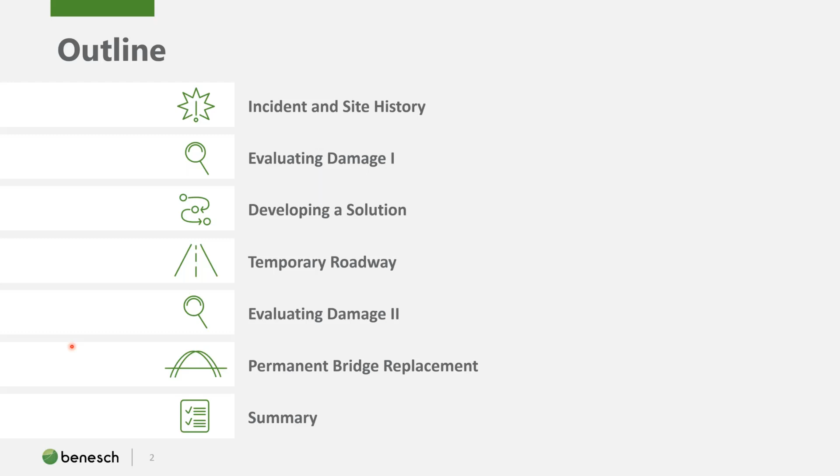This section of 95 sees about 160,000 vehicles per day. Each bound of 95 is carried by a single span steel plate girder with a composite concrete deck. This structure and roadway is owned by PennDOT District 6, and they quickly found themselves in the position of having a very heavily traveled interstate closed for the foreseeable future.

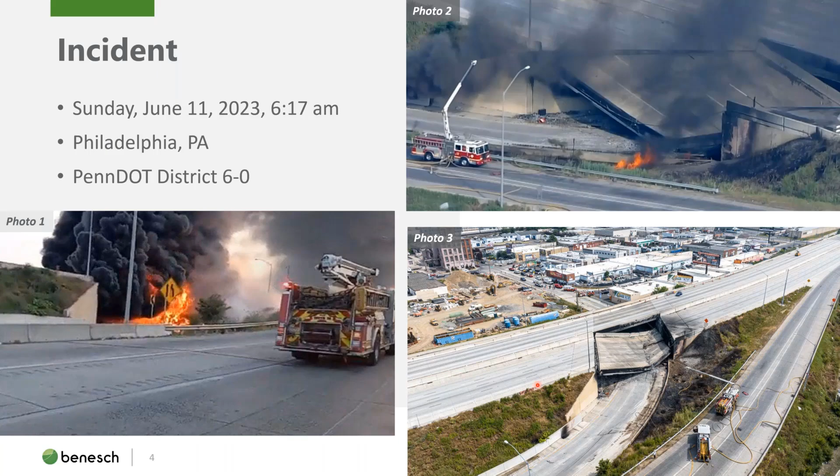So a little bit of context on Interstate 95, if you aren't familiar with this area of the country. I-95 is a north-south interstate that is about 1,900 miles long. It runs from Miami, Florida, all the way to the US-Canada border in Maine. It carries a lot of commercial traffic, about 8 to 9% of the traffic, and it's an important part of transportation along the East Coast.

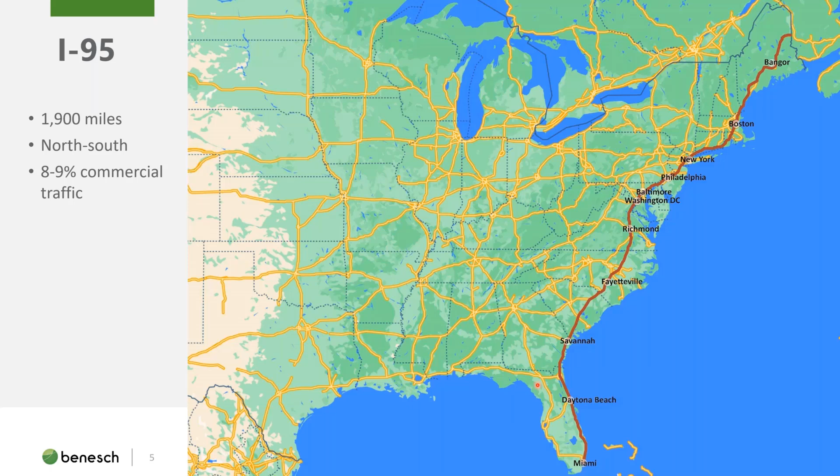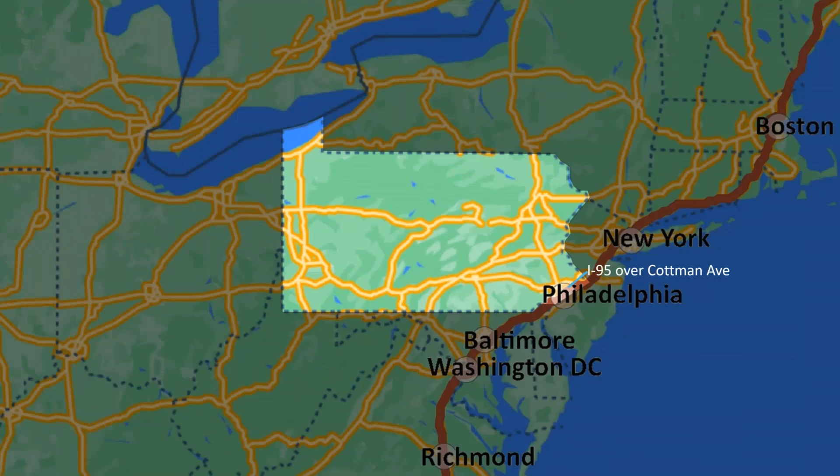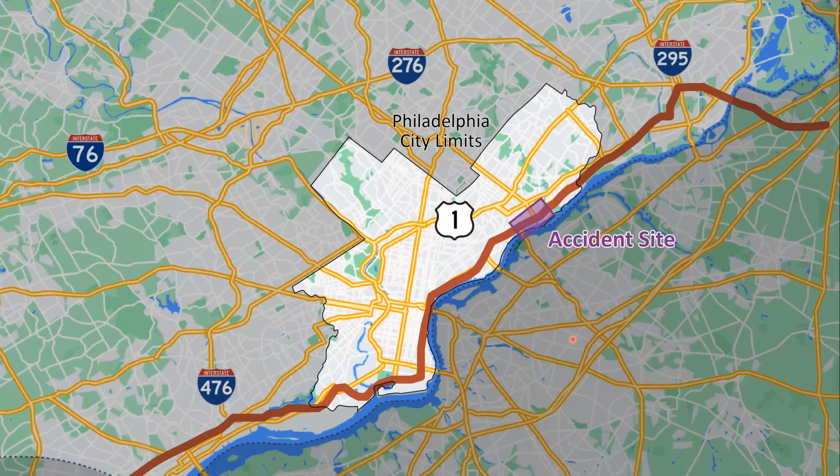So the reason Benesch got involved with this interchange is because we've actually been working at this site for over a decade. PennDOT District 6 has a large project initiative called 95 Revive, which is rebuilding 8 miles and many interchanges along 95 in Philadelphia. It's broken into about 5 different projects, and one of those is the Cottman Princeton interchange, known as CPR, and Benesch is the prime consultant on that project.

CPR covers interchange improvements and reconstruction of 1.4 miles of Interstate 95. It was broken down into 5 different contracts. The most important contract for this group to know is CP2. In CP2, that bridge that you saw collapsed a few slides ago was reconstructed and widened. It was designed in 2010 and constructed over a few seasons from 2014 to 2016.

So it was a relatively young bridge, which did influence some of the ideas and direction the project team took. Another thing to note is most of these contracts were complete at the time of the accident. The CP3 contract was ongoing, so you may see construction activities in some of these photos that are separate from the accident. The total cost of this whole project was $340 million.

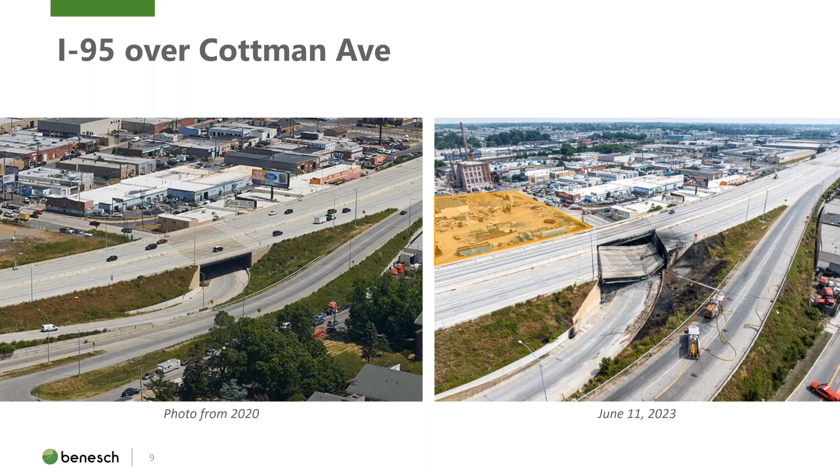So what does a bridge look like after a tanker truck fire happens underneath it? And the answer is it's not good.

On the same day as the accident, an emergency bridge inspection took place on the still standing southbound structure. This was a visual and hands-on inspection, and the group found heavy soot staining on the bridge, which you can get a feel for in this photo - it almost looks like a black and white photo because everything has so much soot on it. This heavy staining really limited the team's ability to complete their visual inspection. They could not inspect connections for displacement-induced cracking.

The fire department actually tried to hose off this bridge an additional time once the fire was out, but they really could not get any of that staining to come off the bridge.

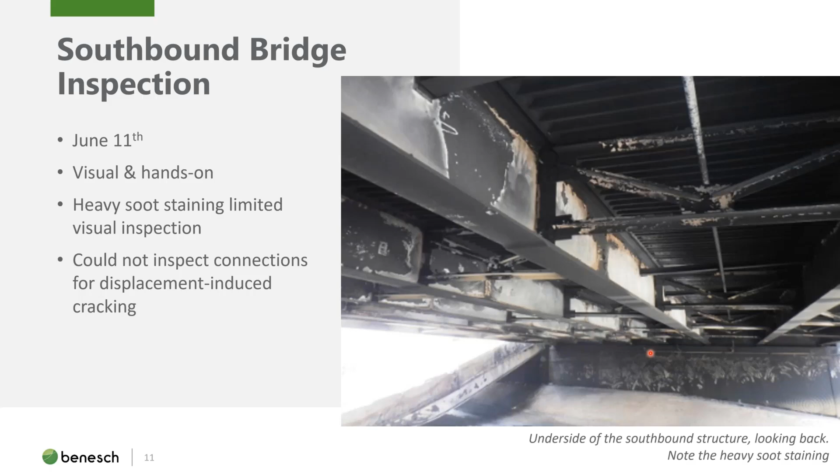This slide has more photos from the bridge inspection. The photo on the left, we're looking at the girder - it's a steel plate girder, bottom flange, top flange, web. These girders exhibited significant web distortion. Closest to the fire, this web distortion was about 2.5 inches for a web that's 43 inches deep. The photo on the right shows cross-frame distortion compared to a level. And then finally, there was significant bottom flange, lateral, and vertical distortion. There were also beams that were not fully bearing on their neoprene bearing pads.

So it quickly became clear from this inspection that the southbound bridge could not be salvaged in any permanent or temporary form. It was decided the same day as the accident to demolish the southbound bridge and start generating ideas to reopen both the northbound and southbound sections.

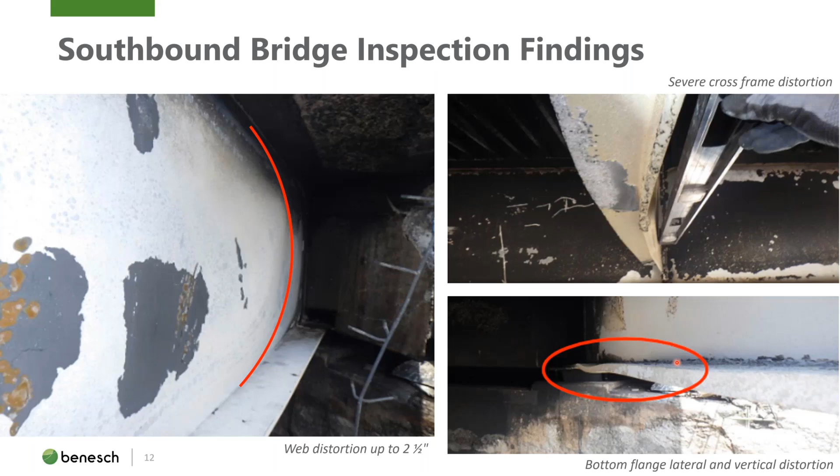Another interesting finding from the southbound bridge inspections comes from social media. This day and age, everyone has their phone on them and takes pictures and videos in all parts of their life. As the southbound traffic was still running over the bridge, and with the little bit of delay it took to get it closed, people were taking videos as they drove across. If you watch any of those videos, you can see a significant dip as the vehicle travels over the bridge, like a sag in the bridge.

This is a screen grab from one of those videos, and just doing some rough proportioning based on dimensions of the median, there's a sag in the bridge during the fire on the order of 9 inches. However, when the inspection team came back once the fire was out, there was no sag noted. The team actually went and measured vertical clearance, compared it to the previous inspection report, and saw no noticeable difference.

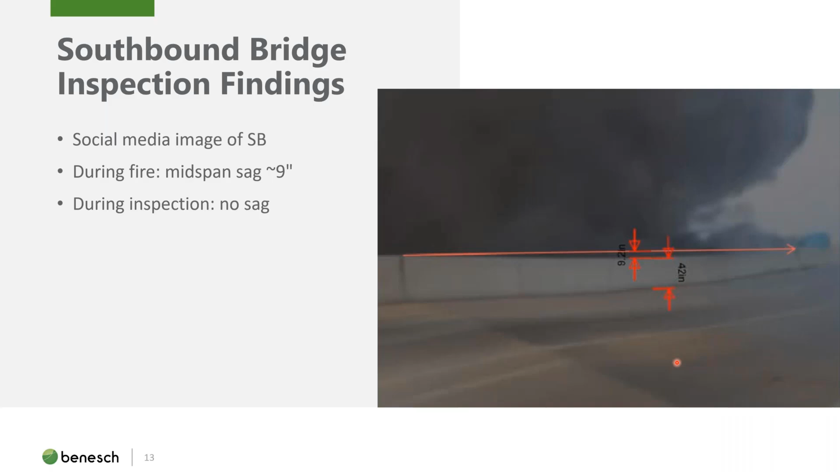However, the bridge was under a great deal of distress. This is a picture of the median barrier of the southbound bridge after the fire, and you can see significant crushing, cracking, and spalling of concrete. We can even see this mat of green epoxy-coated rebar. So that barrier during the sag was obviously under a lot of stress.

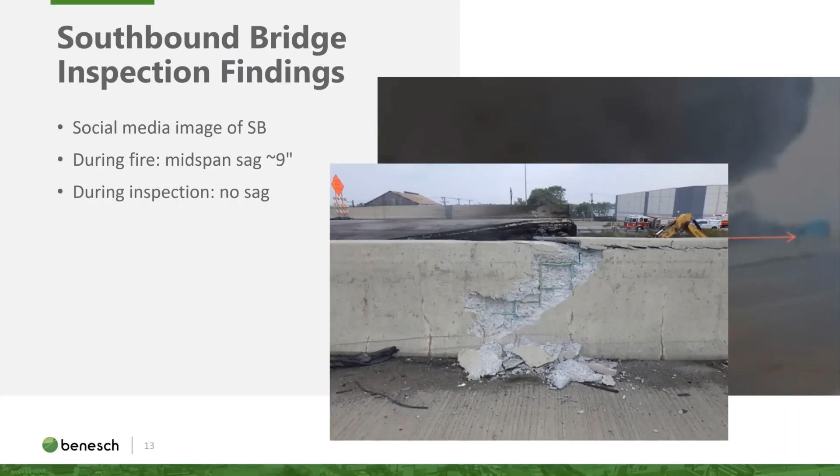Once it became clear that the southbound bridge would be closed, the project team started putting together ideas. The project team consisted of PennDOT District 6, which owns the bridge, a contractor, Buckley and Company, and a designer, Benesch.

I'm going to give you a little background on this project site to give you context about the project solutions. As I mentioned, it is two structures, one carrying northbound 95 and one carrying southbound. Each bridge consists of eight steel plate girders, 16 total, with a composite concrete deck. The bridge is about 103 feet long and has a healthy skew, 34 degrees by the AASHTO definition, 56 degrees by the PennDOT definition.

Interstate 95 here is actually curved, running along a 3,000-foot radius. The bridge beams are not curved, they're straight, with a varying overhang to accommodate that geometry. Because of that curvature, the cross slopes of the bridge deck are super elevated, and the geometry between the two gutter lines on the inside of the bridge actually differs. This doesn't matter when the bridges are separate, as in their permanent final condition. However, when we brought that geometry together for a temporary roadway, that difference actually mattered, and I'll cover that in a few slides.

The out-to-out width of these bridges is about 75 feet. An important thing to note on this plan view is these blue lines. These are sewers running underneath the ramp that leads to Cottman Avenue, Philadelphia Water Department sewers that drain significant portions of Philadelphia during rain events. The Delaware River is sort of south of us in this plan view. Those sewers were in place, and it was important not to overload them as we developed this temporary roadway idea.

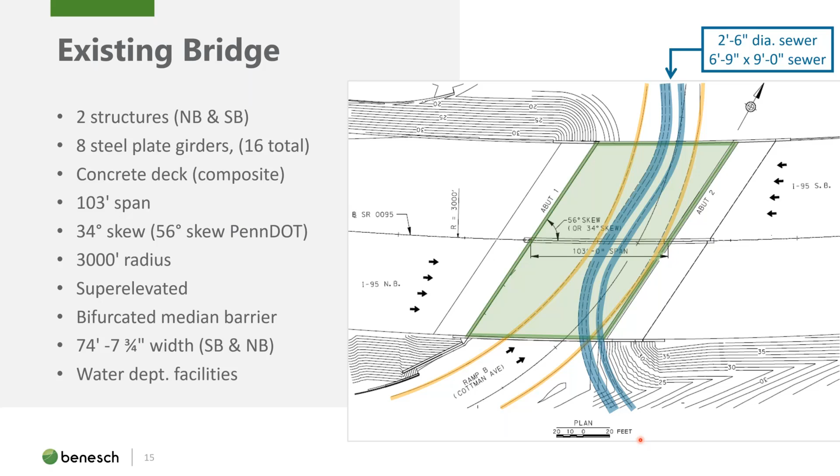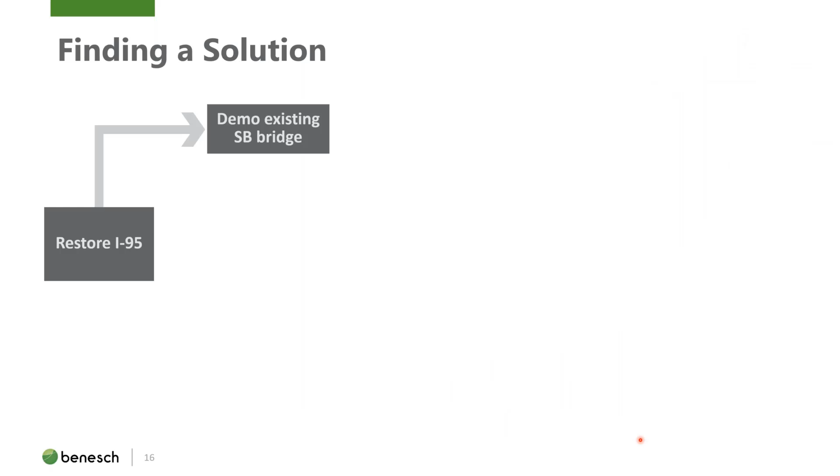So how did the project team develop a solution? The goal was clear: restore 95 to its full capacity. It was clear that the southbound bridge had to be demolished, and the goal was to get to a permanent bridge solution, which in Pennsylvania means a structure with a 100-year service life.

One of the first ideas was just rebuilding the structure as quickly as possible. This structure was designed in 2010 and constructed a few years later, so it was relatively new, and we as designers still had the shop drawings. Someone on the project team reached out to a local steel fabricator, High Steel, and asked if we provide the shop drawings today or tomorrow, how fast can you fabricate these beams and get them on site? High Steel said about 8 to 10 weeks, a really quick turnaround for steel fabrication.

However, that would just be getting the beams to the site. They would still need to be erected, you'd still need to pour a deck and a barrier, do the concrete repair work, replace the approach slabs, and weave everything together with the interstate. So this timeline was still looking like 3 to 5 months. This full rebuild could be achieved in 3 to 5 months, which is really fast, but having that interstate closed for that long felt like too much of an impact to Philadelphia and travel along the East Coast. So the project team started looking at other ideas.

This is where the idea of a temporary roadway came in. Could something be constructed quickly, in a matter of weeks, to restore some capacity at the site to get traffic moving, with the permanent bridge then built in stages around it? One issue with the temporary solution is that anywhere you build something temporary, you're building something in the way of the permanent bridge, so staging became very important in both the temporary roadway and the permanent bridge stages.

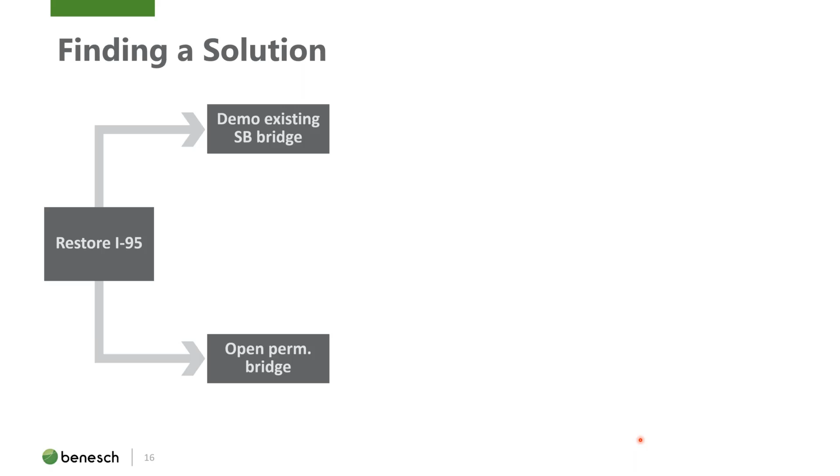The solution involved demolishing the existing bridge and constructing a temporary roadway to open Interstate 95 at 75% capacity. From the start of demo to the opening of the roadway was 12 days, originally estimated on the order of weeks, but the contractor was able to deliver it very quickly. This came at a cost of about $5 million for both of these projects.

The demolition was completed by one contractor with a direct contract with PennDOT. Design work related to the temporary roadway was completed by Benesch, contracted with PennDOT, and then a separate contractor, Buckley, constructed it in 12 days, also contracted with PennDOT.

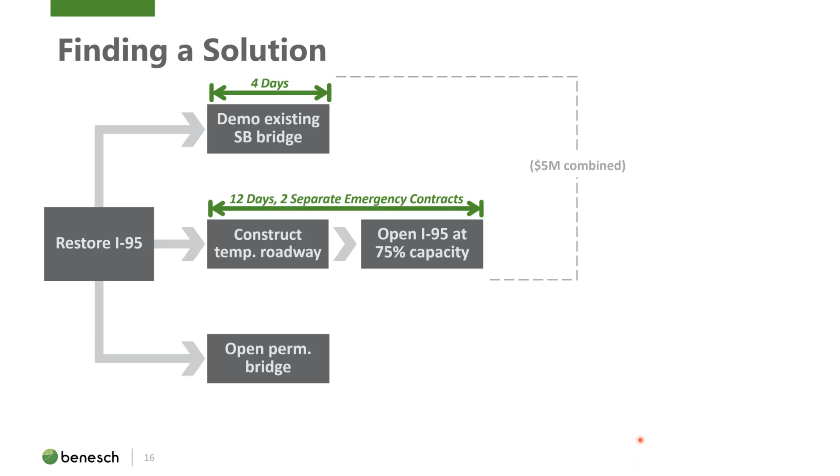Once that was complete, work moved to the permanent bridge replacement. That looked like updating the steel design first, because we had the opportunity and a little bit of time to do it, ordering and fabricating the steel on a very accelerated timeline of 8 to 10 weeks, constructing stage 1, which took about 5 months, and then finishing construction of stage 2, which took just under a year.

The work related to the permanent bridge cost about $18 million and was delivered with a design build contract for efficiency to move through the design quickly.

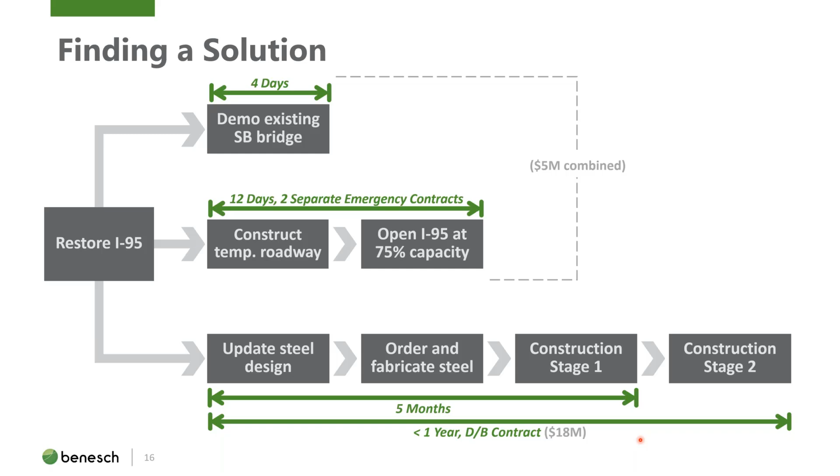A little bit more about the temporary roadway solution with some graphics. The idea was to start building a temporary roadway in the middle of the section of 95, using retaining walls and fill to build a roadway on top so traffic could use it. In stage 1, traffic uses the temporary roadway, 3 lanes in each direction, while stage 1 of the bridge construction starts.

Once stage 1 is complete, traffic is moved to the outside, again 3 lanes in each direction, and stage 2 construction starts. Once stage 2 is done, the site can be fully restored back to 4 lanes in each direction.

Now, if you were paying attention, I told you that the out-to-out of each bound was about 75 feet. If you start adding up the numbers, on one bound we're going to have 3 11-foot lanes, about 33 feet. In the next stage, which is separate, we're going to have another set of 3 lanes, so we're up to 66 feet of lanes, plus some room for barriers and a little bit of room to work between the stages. You can see how we get very close to that 75-foot out-to-out, and how these staging limits really worked by a matter of inches.

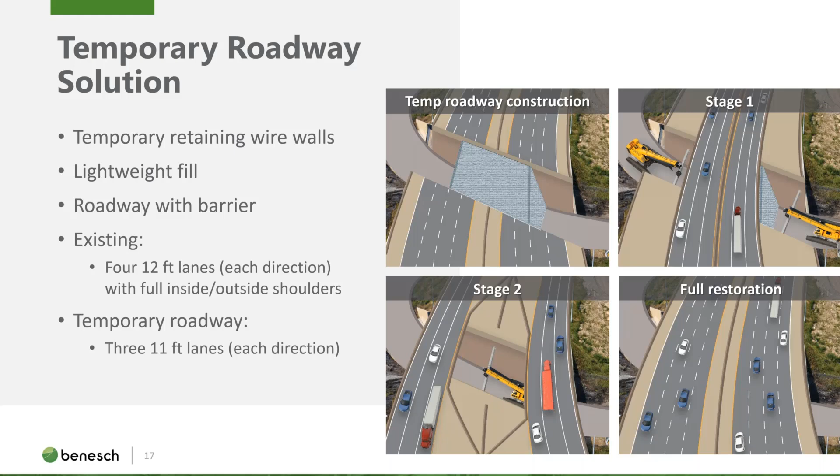Now I'll talk a bit more about the components of the temporary roadway. Here's a cross-section from our design plans. You can see 11-foot lanes on top and another set for the opposite bound. The temporary roadway consisted of leveling out the area on Cottman Avenue and using a combination of steel wire walls to act as retaining walls and ultra lightweight fill to act as the fill between the walls.

There are geogrid straps that extend into the lightweight fill for additional capacity. The wall extends up until we get to a reasonable elevation to put down a roadway subbase and then a typical asphalt roadway. The roadway is contained by a special outside and inside barrier, which I'll get to in the next few slides.

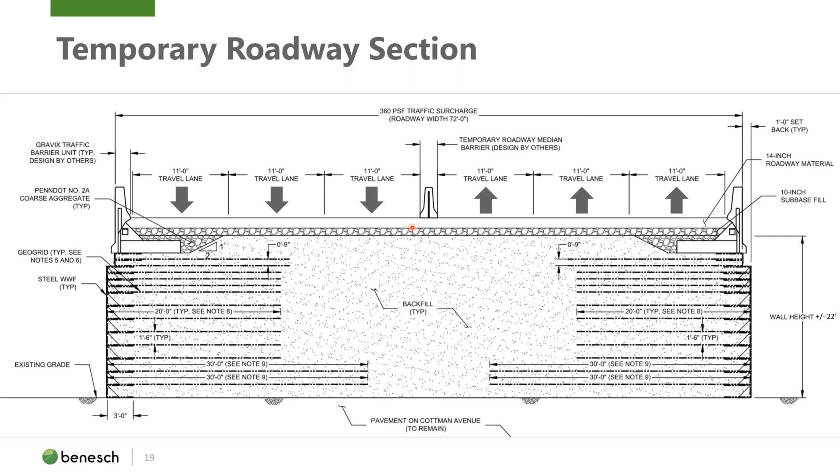The ultra lightweight fill is actually ultra lightweight foam glass aggregate, selected to minimize loading on the sewers underneath Cottman Avenue. This is an interesting product. Typical fill might run between 120 to 150 pounds per cubic foot, but this fill is very light, 20 pounds per cubic foot, and feels like a pumice stone. It has a high friction angle at 40 degrees. For this project, we used 8,000 cubic yards, produced from 8 million recycled glass bottles, so there's a nice sustainability component to this kind of fill.

It's very lightweight. It can be shipped by truck or even plane. It's non-toxic, non-flammable, non-porous, and insulated. And like every component of the temporary roadway, it was available for very quick delivery to the site. This particular product is made in Pennsylvania, and the fabricator actually has a couple other plants throughout the United States. This is also a product that the designer and the contractor and PennDOT have experience using in nearby and adjacent sites.

So as you can see in the photo here, there is a construction worker using a hand compaction tool to compact this material. One unique thing about this is that you can't use traditional rolling equipment to compact the fill, or else it will actually start to crush it. It needs to be compacted with hand tools, and once it is and locked into its matrix, it's very capable of managing vehicular loads.

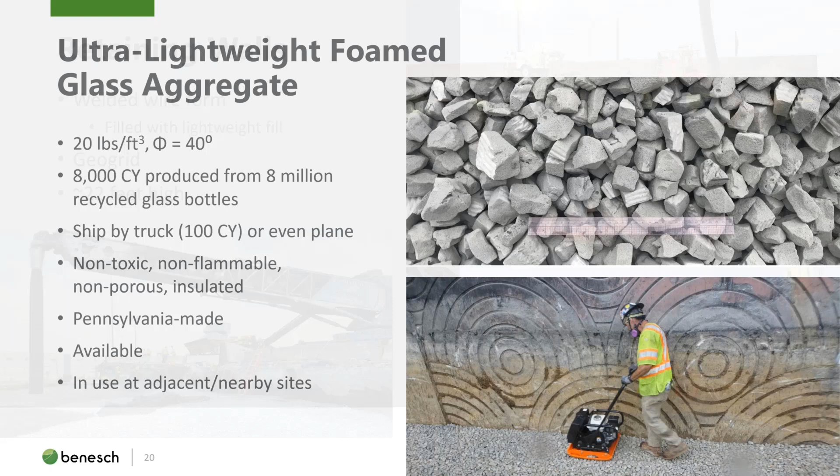So the next component is welded wire form walls that were filled with a lightweight fill. You can kind of see they look a little bit like baskets. You can see sort of the different levels of these walls, and it's sort of a grid and just is built up to the appropriate height. And the fill was placed with a lot of machine work, using sort of ramps and hoses to get it where it needed to be on the roadway. And again, those walls are about 22 feet high.

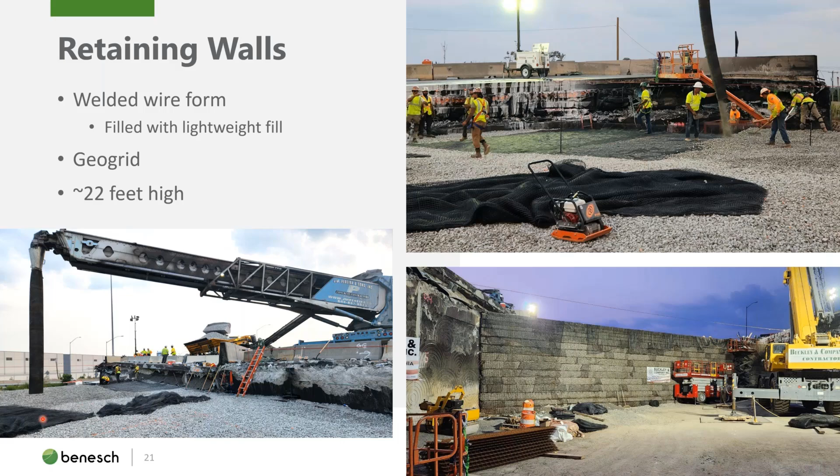So moving up to the roadway, the outside barriers that were used were a unique product. These are precast barriers called Gravix barriers. They are basically little moment slabs. It's an L shape, and the bottom of the moment slab is loaded by a typical roadway subbase 2A, not the ultra lightweight fill. And once it's loaded, it provides some capacity for the barrier to resist impact from vehicles. This barrier has actually been crash tested and has a MASH TL4 rating.

These units come in a rectangular footprint in plan, and since we have a skewed bridge site, we actually had to do some additional cutouts at these ends of the bridges, or as you moved into the roadway. So additional approach slab, diaphragm, and back wall areas were cut out to slot these rectangular footprints into the skewed site.

Another thing to note is these barriers are meant to kind of sit on MSE walls, and it has this nice tab that sticks down to make a nice appearance. We didn't need this tab. It's for aesthetics, not for any structural capacity. So this was removed so that the wall and the barrier could be as close to flush, because again, our staging limits were very tight.

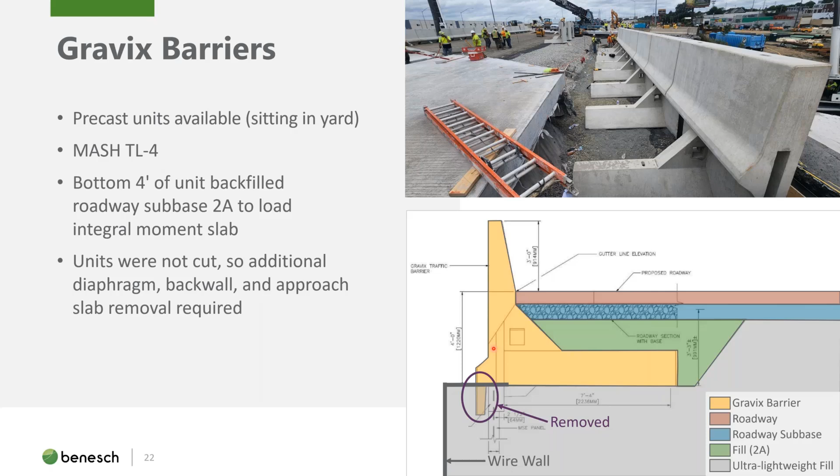The median barrier was also unique. It is a typical embedded median barrier. However, due to the curvature of 95, the existing roadway and the cross slopes of the bridge and the roadway needed to be super elevated. As you bring that geometry together in the median, the gutter lines are separated by about 4.75 inches. So we needed to put a bifurcated median barrier into this roadway.

These types of bifurcations aren't the kind of thing that are just sitting around. So this barrier was actually fabricated for this project. The contractor reached out to the fabricator who made the median barriers in this project during the original construction from 2014 to 2016. That fabricator had two forms that were available that they could modify. They did so, and they basically cast these barriers for 5 days straight, 24 hours a day, including a weekend, so they could be delivered just in time for construction at the site.

They were shipped with a strength of 3,000 PSI, and the fabricator was breaking cores regularly to make sure they knew exactly when they could pull that form off. And they have a 28-day strength of 4,500 PSI.

So from rendering to reality, one thing I haven't mentioned yet, and I think is obvious with this project, but this project had a lot of attention locally, nationally, even maybe internationally. It was a big impact to a major city on the East Coast, and there were press conferences. There was a live stream camera that was constantly running to show construction activities at the site. There was a PennDOT website set up to provide regular updates to the public.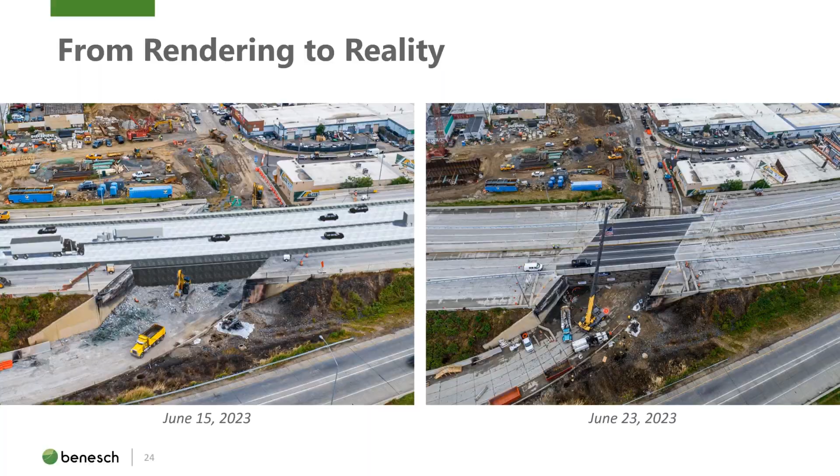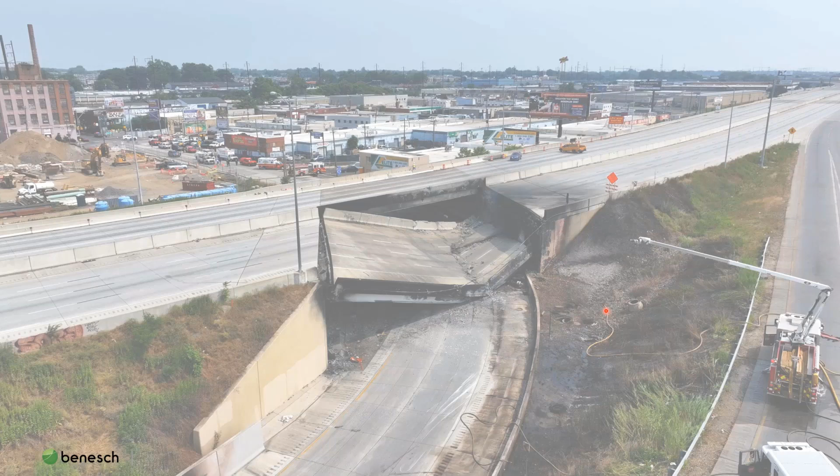So I have a video just to show you some highlights from the temporary roadway construction. So we're starting back on the day of the accident with the collapsed northbound bridge. And those shots of Interstate 95 being completely empty are sort of jarring for me. It should be full of traffic and people trying to get where they want to go, but it was completely closed. We're moving into demolition of the northbound and the southbound structures and cleanup of the road below to prepare it for the temporary roadway.

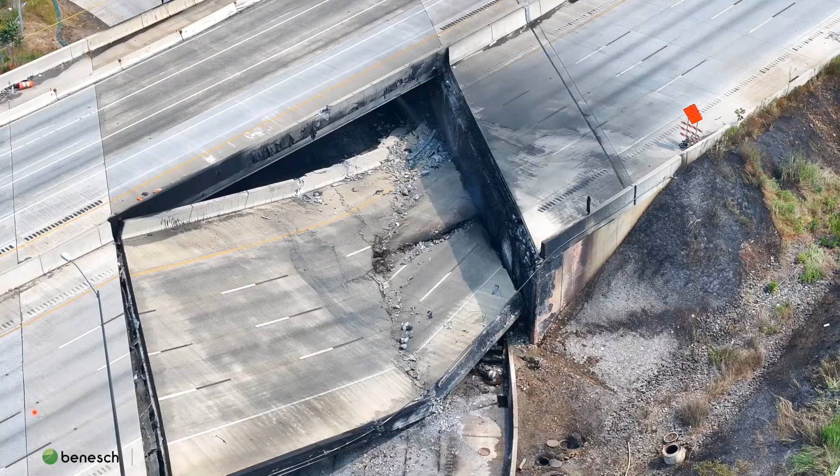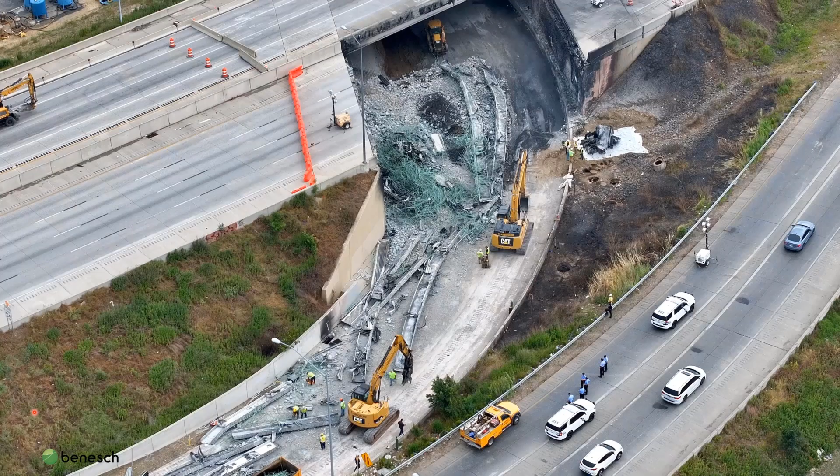And then we're moving into construction of the temporary roadway. You can see the lightweight fill being placed between the walls. And it's clear from this shot, this is a night shot. Work went on this site 24 hours a day to get this open as quickly as possible. We're moving up to the roadway height.

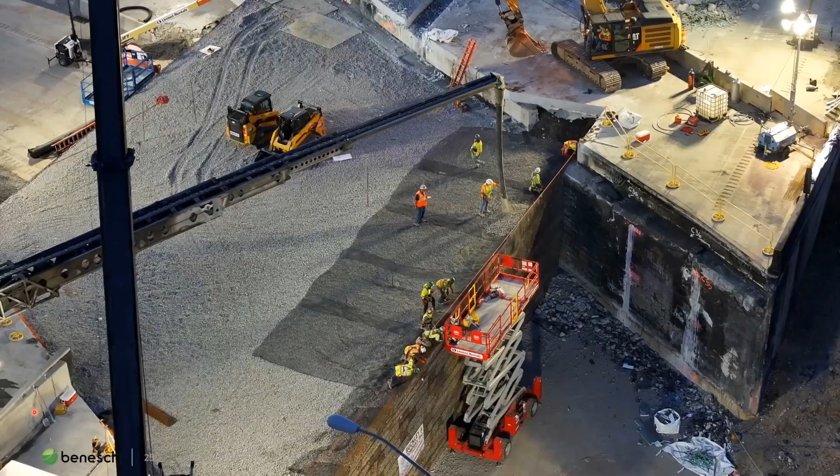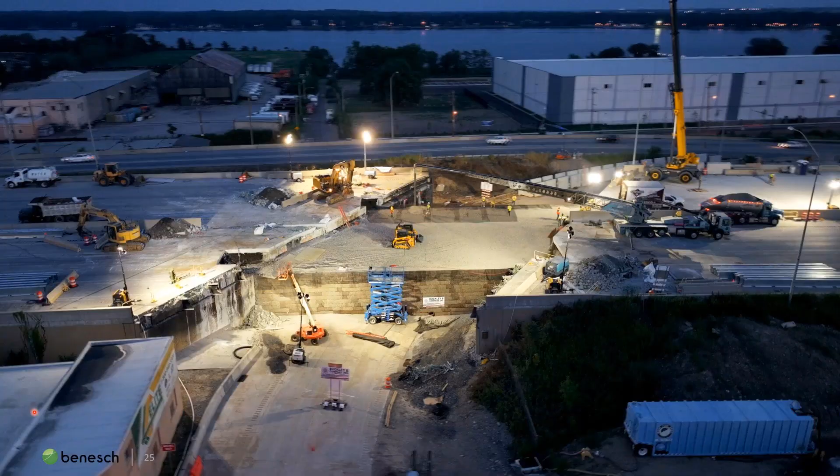And then we jump forward to opening day. Right before it was open to traffic, this traffic you see on the left side is actually detour traffic. And then here we have the first set of traffic moving across the bridge in those 3 lanes. And a short time later, that other side was open.

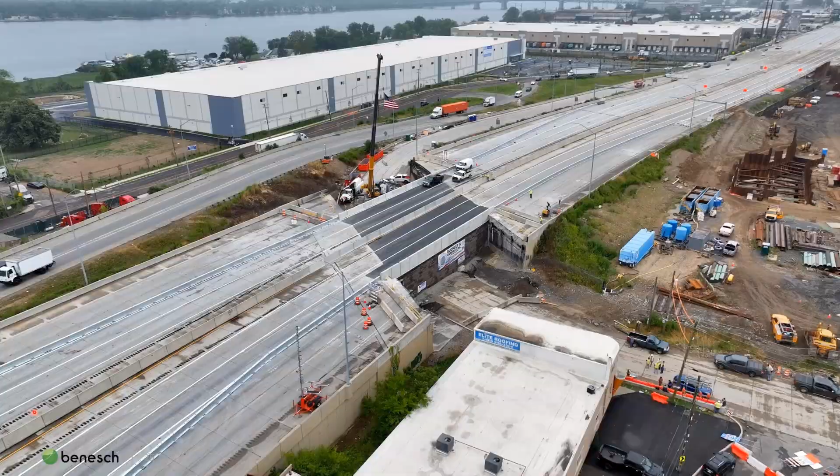This abutment in its original form had 1.5 inches of architectural treatment plus 2 inches of cover before that first mat of rebar. So that fire was so intense that it spalled out several inches, maybe even up to 8 or 9 inches of concrete from the existing face of the abutment wall. This abutment is actually just a cantilevered abutment, and it has a battered back wall. So it's actually over 4 feet thick at the base.

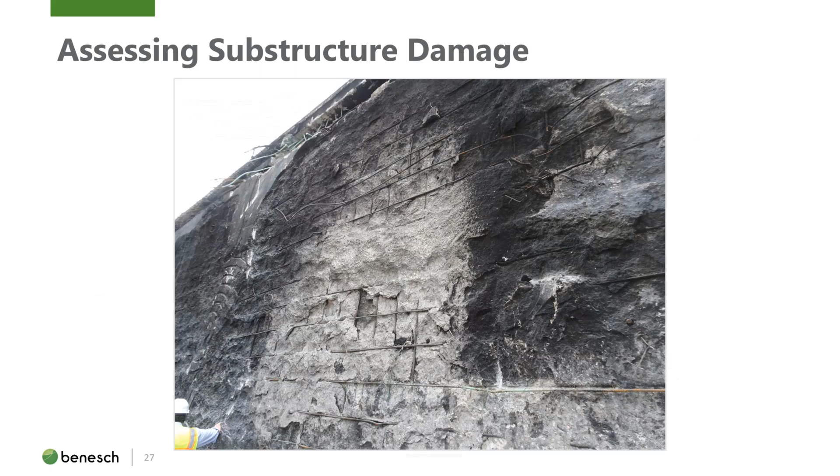So just from some evaluation with the contractor and the design team, everyone felt that the abutment probably could be repaired, meaning removing the damaged concrete, replacing any rebar, and then recasting new concrete to restore it. But it was important to evaluate what was actually going on there. So the project team hired a company to come out and take concrete cores all over these abutments. This plan view shows the rough idea of how the cores were taken, 12 cores more near the location of the crash and fire, but also catching every abutment to get some information.

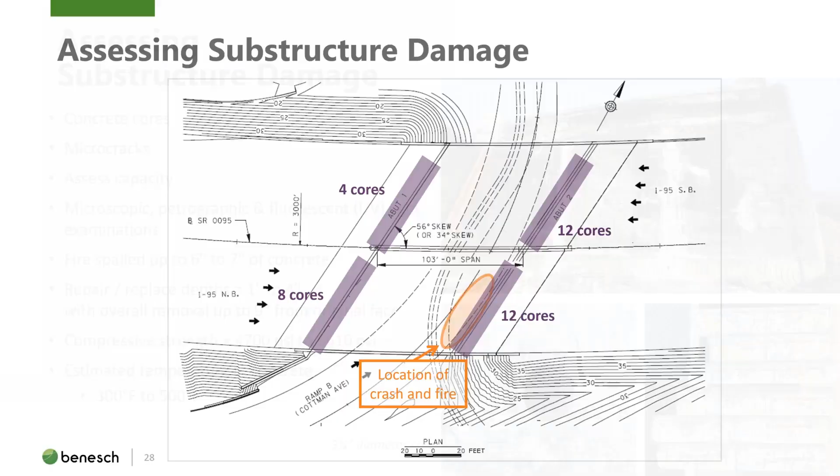So those cores were taken to a lab and they were evaluated for existing microcracks that were left, and also to assess the capacity of the concrete. As this concrete was exposed to intense heat, the water vapor in the concrete matrix tries to expand and you get spalling concrete. And as that concrete spalls, it leaves behind microcracks, which need to be removed to restore the concrete.

So the lab took those cores back. They examined the concrete using microscopic, petrographic, and UV light examinations and found that the repair or replace depth of the concrete that was still there was on the order of 1 to 4 inches. I mentioned fire spalled out maybe 6 or up to 7 inches of concrete in some spots. So we detailed removal depths up to 9 inches from the original face.

The lab also examined the samples for compressive strength, and that ranged from 4,700 PSI to 6,600 PSI, and this is well beyond what we use for design, so that was very comforting. The lab also reported an estimated temperature in the concrete of 300 to 500 degrees Fahrenheit.

We do think of concrete as an insulated material, and it is, because it was likely that the actual fire itself was on the order of 1,800 degrees Fahrenheit. That estimate comes from firefighting teams who are used to responding to these kind of tanker truck fires. So it was a very intense, hot situation, and the bridge and the concrete sort of show those effects.

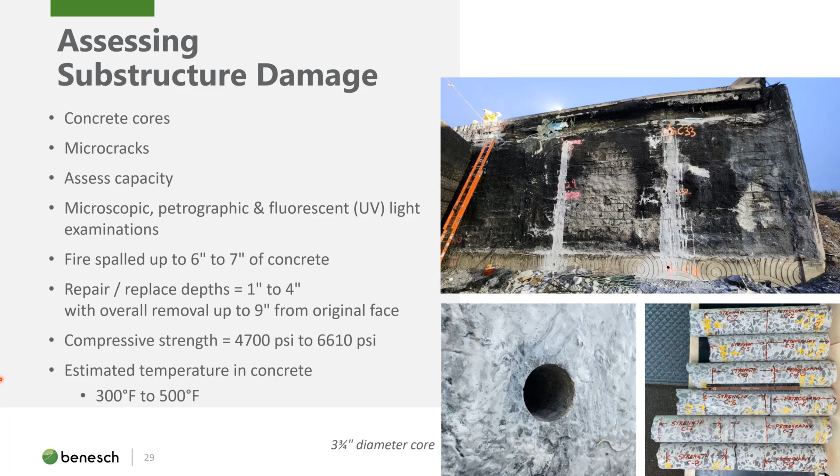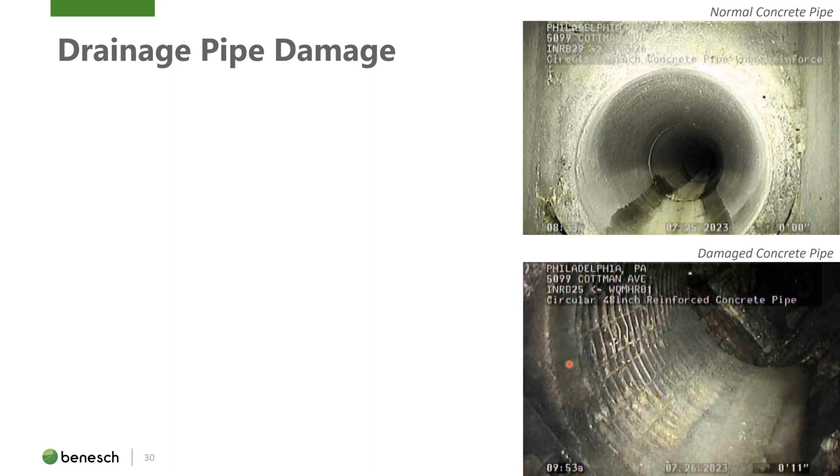However, there were also plastic drainage pipes at this site, and those did very poorly in the fire. So this is a video shot of what used to be a plastic pipe, and it's basically melted and collapsed, and there's nothing left. So all of these areas had to be dug out and have the drainage pipe replaced, which adds time and some of the work to this project.

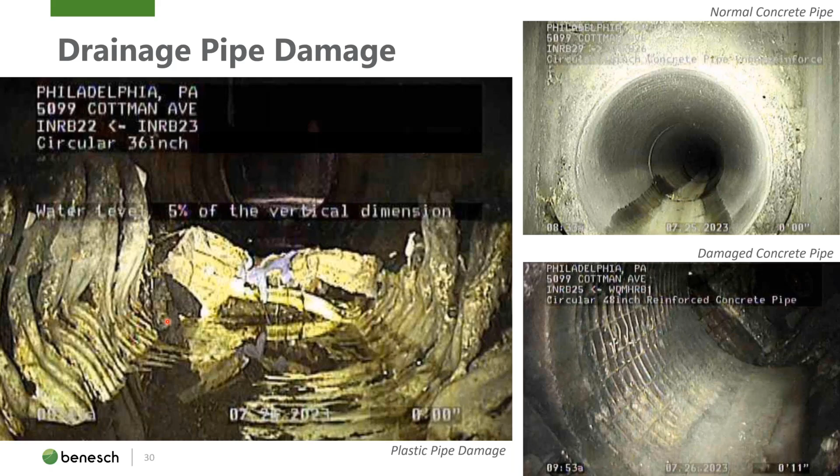One thing to note, in the original design and construction, there were stage construction joints along the top of the beam line because it was built in 3 phases instead of 2. And that's what you would typically do, put a joint on the beam line, and it makes it easier. We had joints that were running along basically in between these beam lines.

So we had to add in some checks in our temporary condition and just be mindful in construction of that really large overhang that actually exceeded the beam depth in some spots. It's not something you ideally do in a typical project, but it's something that we accommodated in this project because those staging limits were so important.

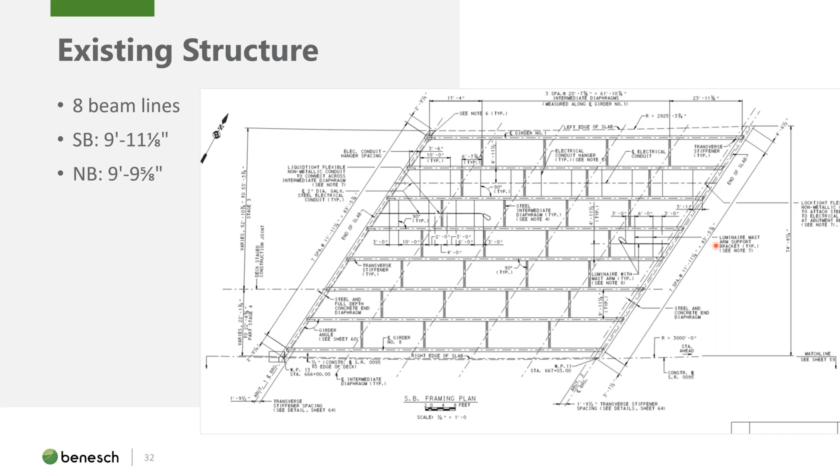PennDOT asked us to update the steel bridge design to current code. So that meant taking this from AASHTO LRFD 3rd edition up to 8th edition. So one thing we did was we changed the barrier height from 42 to 45 inches for the MASH barrier update. We also had to add a PennDOT design truck that had come into play in some of our newer design manuals. It's the P2016-13 truck, and it's very long and it's very heavy.

So it's about 165 tons, and it has a varying length, 103 to 132 feet. And it turns out when you have a bridge that's 103 feet and a truck that's very heavy and also can be 103 feet, it can fully fit on the bridge, and it did end up controlling some of our design checks. We evaluate this kind of truck at the operating level, not necessarily an inventory level, but even at that lower level, it still does control. And as I mentioned before, we incorporated some differences related to that stage construction joint and that big overhang in the temporary condition.

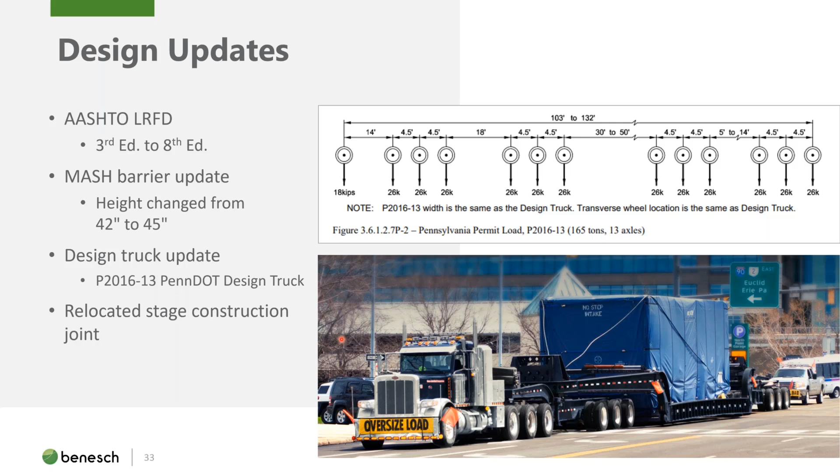Some things we thought about during the steel design: we used a line girder analysis for the beam design, but given that skew, it kicked us into using refined analysis to check a couple things. We used that to pull out cross-frame demands for our design checks, check for uplift in some of those corners, pull out bearing rotations for that design, and check bottom flange lateral forces to make sure those assumptions we used on the line girder were accurate.

We actually had two models for this effort just as a cross-check: one was a LUSAS model and one was an AASHTO BRR model.

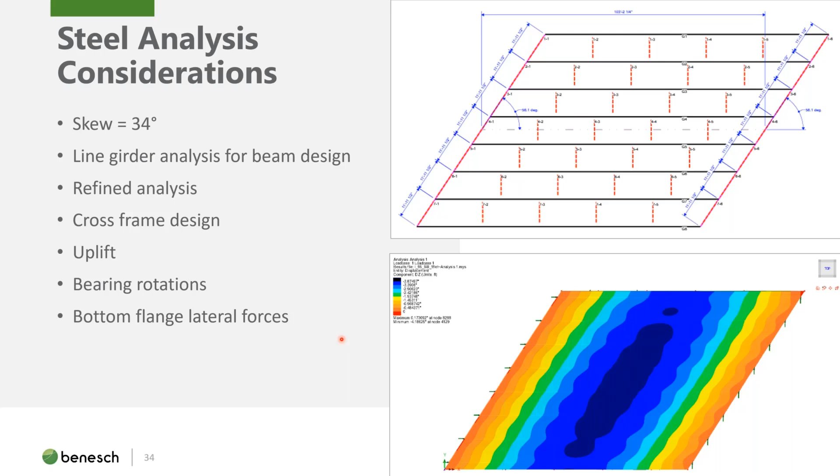So a couple updates came out of the steel design. One relates to the cross frames. The existing cross frame, shown at the top of this slide, is probably exactly what you'd expect for a typical cross frame. It has WTs as the members, which are welded to gusset plates, and the gusset plates are bolted to the stiffener. Nothing unusual about this.

As we worked through our design checks, we had a lot of trouble getting the weld that was in the existing design to work for the fatigue checks. It was really the fatigue analysis we struggled with, and as we tried to make that weld bigger, the gusset plates got really large and the cross frame geometry started looking funny. So we reached out to the fabricator and asked if we could switch to a fully bolted connection—if you can't get the weld to work, just take it out of the design. The fabricator was fine with that change and accommodated it. So if you go look at that bridge, you'll notice it has a fully bolted cross-frame connection.

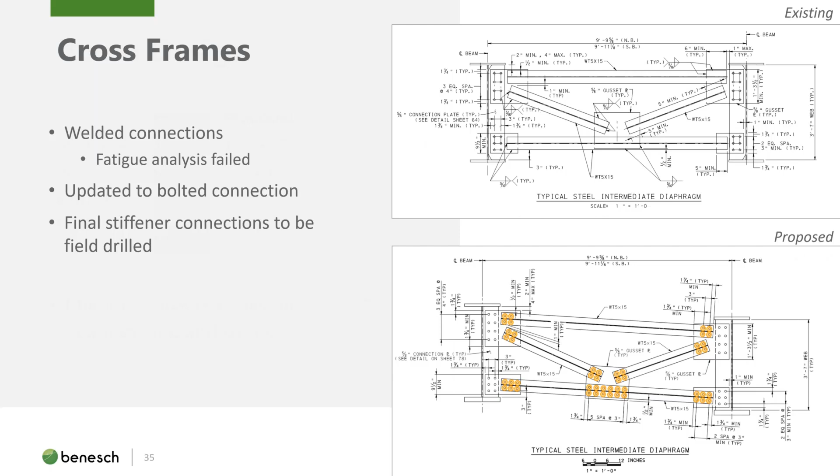Another thing to note: this slide summarizes the beam plate size changes. There's a lot of info here, but basically the web depth, 43 inches, stayed the same, while pretty much every other plate got bigger. The top and bottom flanges got wider and thicker, and the web thickness increased by an eighth of an inch.

One change we made at the request of the fabricator related to the bottom flange. In the original design, shown on top, there are two different thicknesses joined by a shop splice in the fabricator's shop. The fabricator came back and said if we take out that shop splice, we can fabricate this beam a lot faster—was that okay? We said yes, that's fine by us in design, and PennDOT was comfortable with it. This was a case where we made a tweak just to accelerate fabrication.

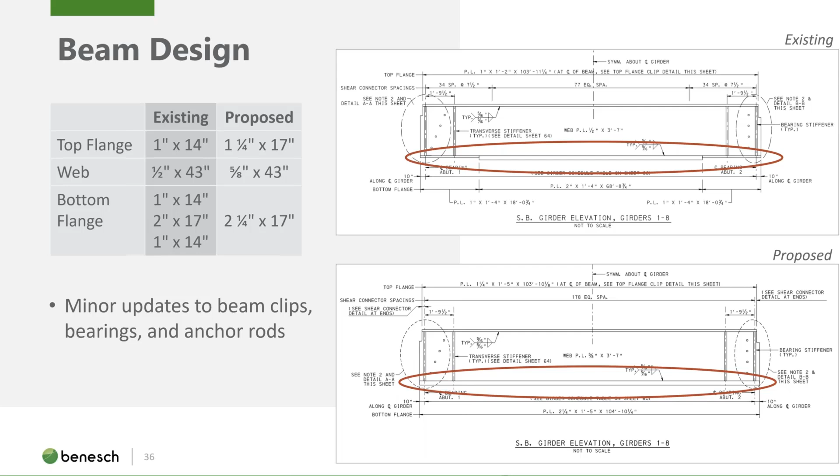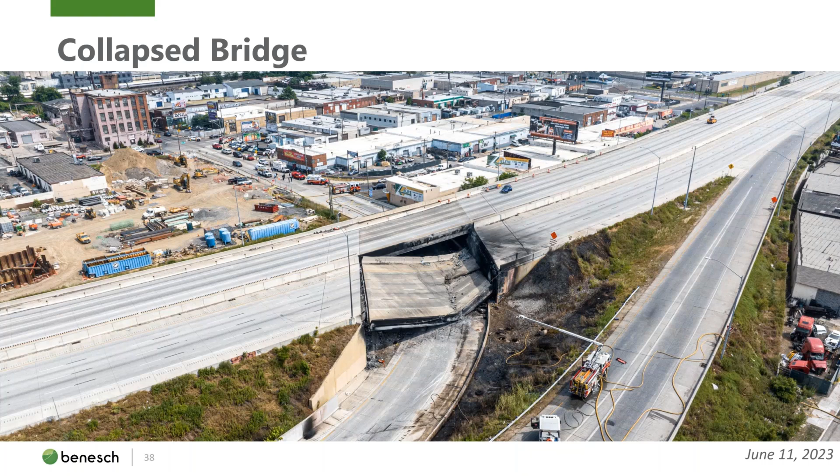Now getting to some project summary photos. Here we are back at the beginning of the project on June 11th, 2023. We see the collapsed northbound structure, and we know the southbound bridge is going to be demolished. Moving forward about 5 days, everything has been demolished, leaving basically a gaping wide open hole in an interstate that should be seeing 160,000 vehicles per day.

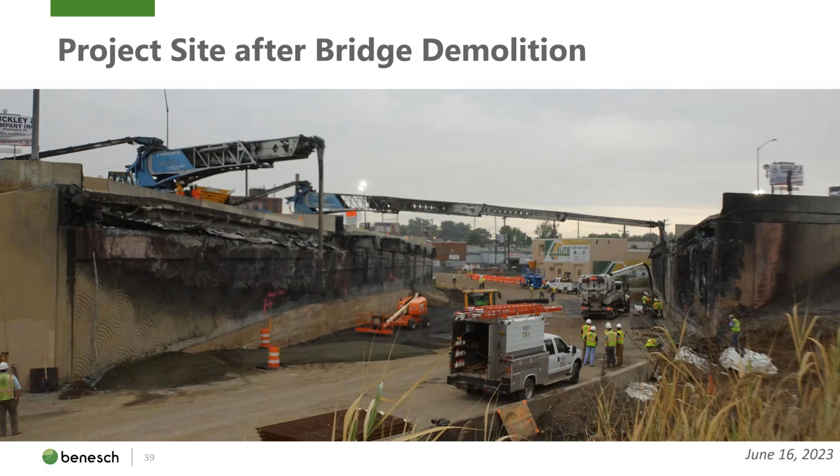Moving forward, we have the completed temporary roadway. This was opened 12 days after the accident, on June 23rd. You can see the asphalt roadway, 3 lanes in each direction, with just enough room on the outsides to start building the bridge.

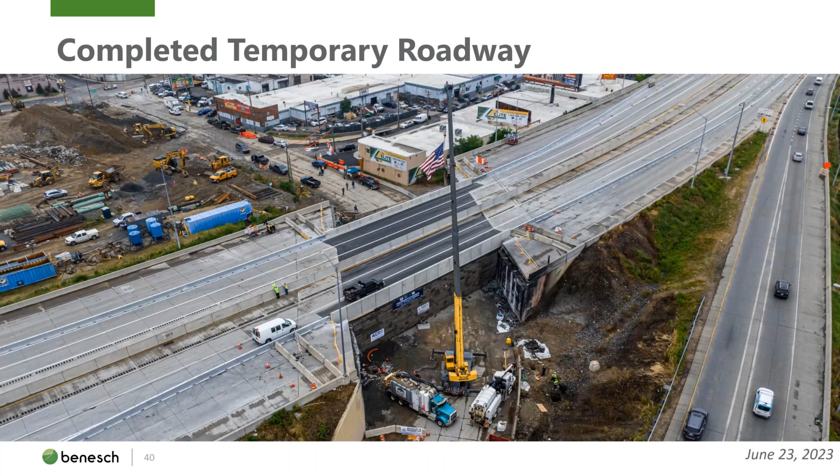Moving into the summer, now about August, a couple months after the accident, traffic is using the temporary roadway—you can see 3 lanes moving. Fortunately in this picture there are no significant backups, though I know that happens sometimes at rush hour. We can see stage 1 of the bridge going into place, with 4 beams on each side. You can see the cross frames built in, full construction, a couple cranes on site, and a lot of activity. As mentioned, the roadway to the ramp leading to Cottman Avenue was closed for the duration of this project.

One important thing about stage 1 was that it was important to get this structure built before winter. Typically in Pennsylvania, construction activities wrap up by November 1st because at that point it starts regularly being too cold to pour concrete. So we were moving through design, construction, and shop drawing review very quickly throughout that summer with the intent of getting it open in November. We did succeed on that timeline - the first stage of the permanent bridge replacement was completed and opened in early November.

Within a few weeks, the temporary roadway was demolished and removed from the site. One interesting thing to note is that the ultra lightweight fill from the temporary roadway was actually taken to another project in Philadelphia. It was a CAP project and was reused there, so it was great to be able to reuse something from this site.

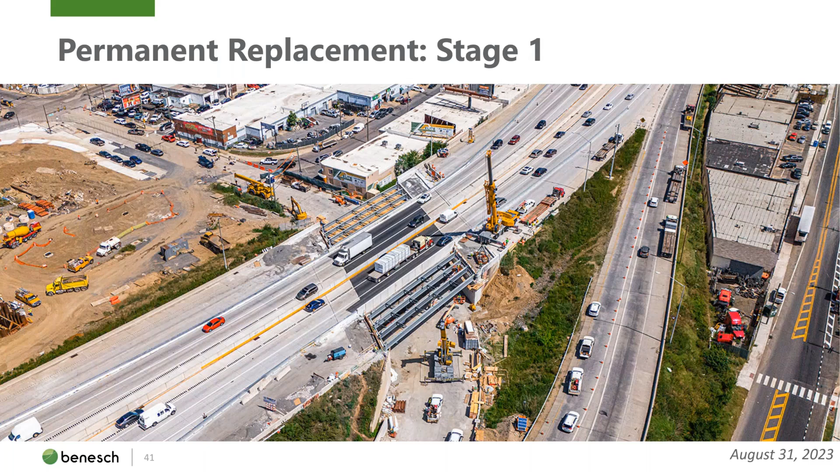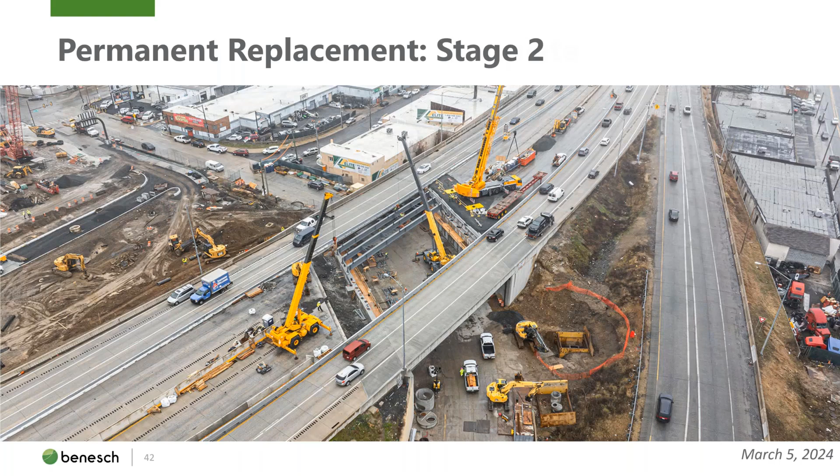So I have one more video here highlighting construction of the permanent bridge.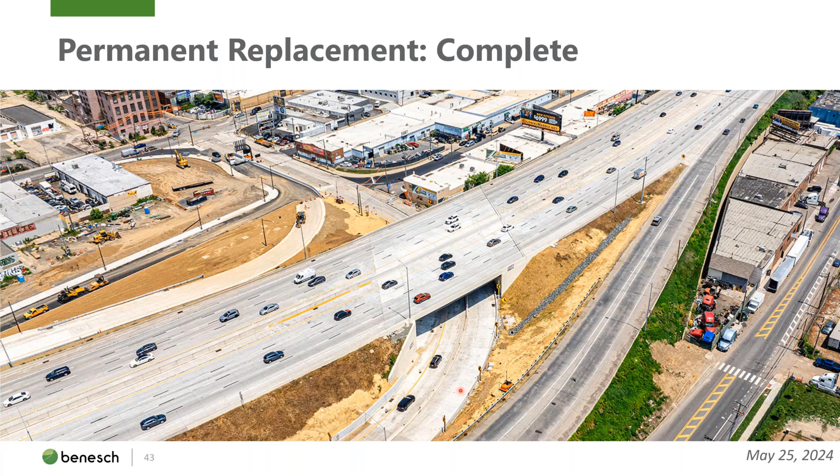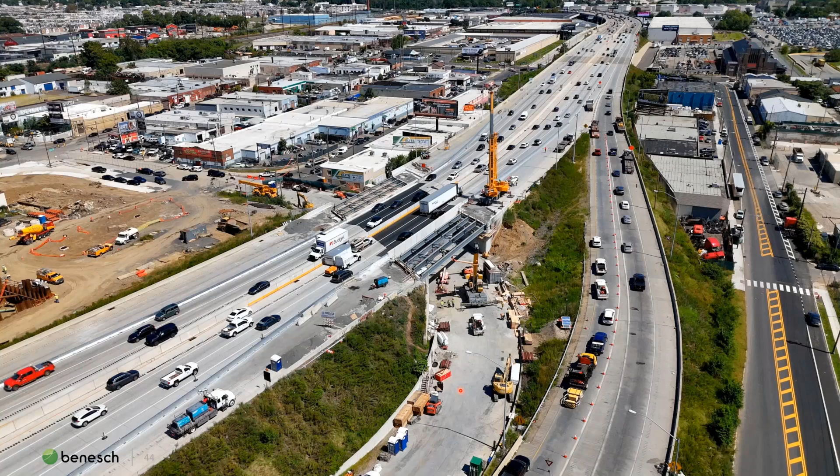Here we are, traffic is using the temporary roadway, and you can see four beam lines that have been erected on each side of the bridge. Again, very tight work site - you can really get a feel for why these staging limits work by inches. Now we're moving into deck pour on stage 1. We have our Bidwell pumping the concrete onto the deck and getting it placed. A lot of these deck pours took place at night so the contractor could have one lane closed of the existing roadway for access.

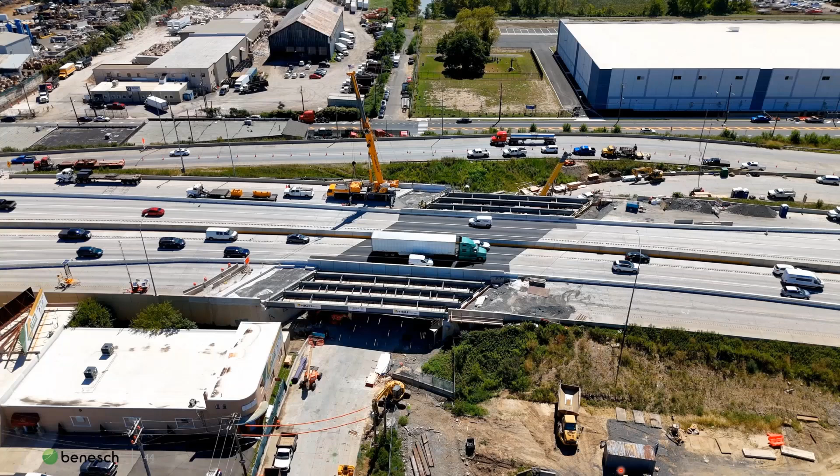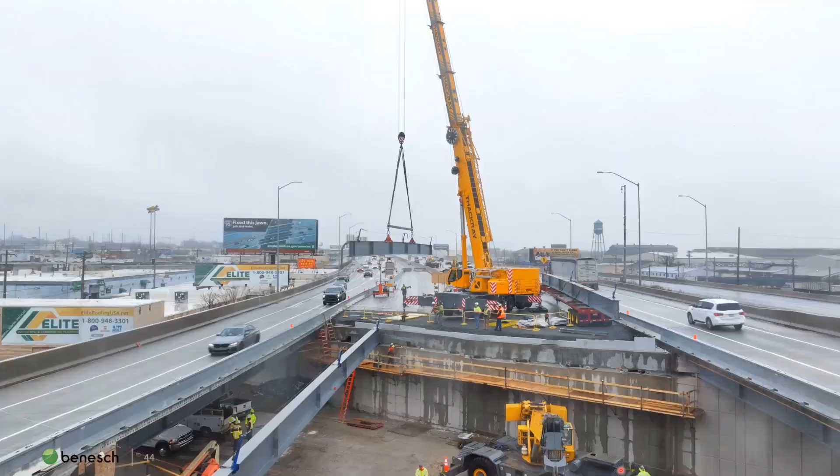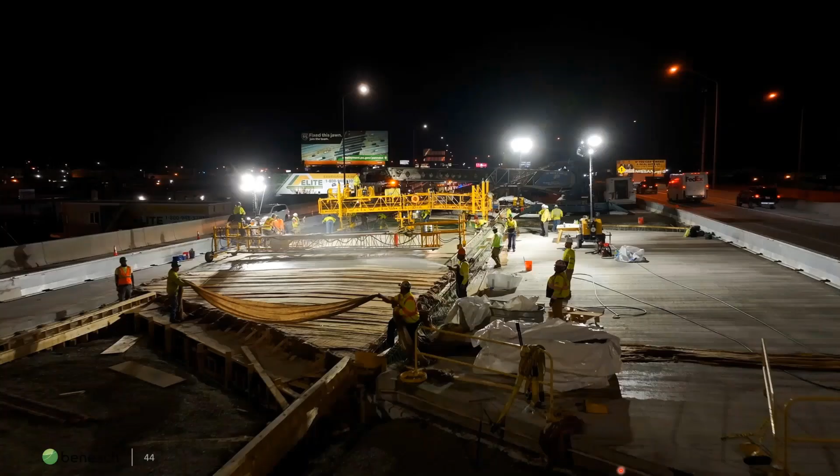Now stage 1 of the bridge is done and we've moved on to stage 2 construction. We get these nice shots of beams being erected by the erection team, again working in a very tight site with traffic moving by really fast on both sides. Then on to deck pouring - again, back to pouring these decks in phases, having the Bidwell out, the pumps, getting the concrete up there. And then we move to the fully constructed section, cleaning up the site. Here we are, just showing traffic using the reconstructed section.

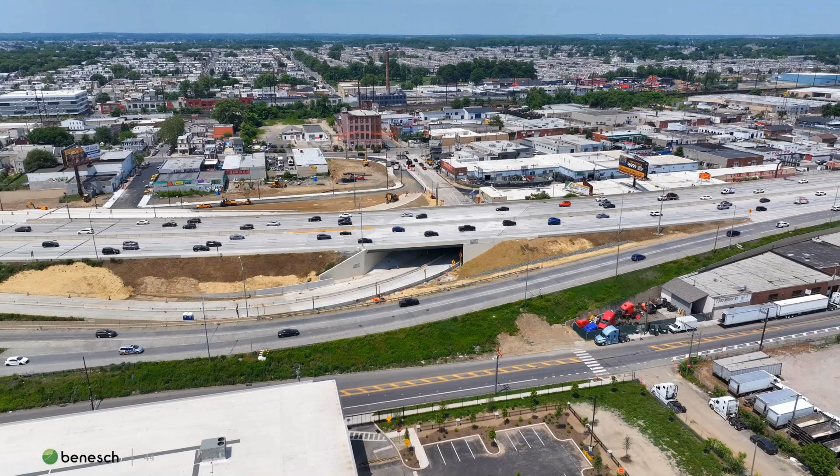One of the most important things to think about is communication, teamwork, and collaboration - that's the first lesson learned. It's really important to communicate and work together on these projects, both within the design team at Benesch, but also working with the contractor, the client (PennDOT), the fabricators, and the suppliers. It takes a lot of regular communication to make sure everyone understands what's going on, and it takes a lot of collaboration to come up with an idea like this and find all the pieces and make it all work together.

Another lesson learned relates to the contractor on this: reach out early in an emergency project to understand product availability.

There are probably a lot of different ways to build a temporary roadway, but the way we did it on this project relates to the products that were available. We could get enough of that ultra lightweight fill, we could find the wire walls, and even some of the components on this project maybe were sitting in another contractor or fabricator's yard for a few months, ready for a different project, but this project took it and used it, so it was still work for that contractor. It's back to teamwork, finding out what products are there, what can be used, and how you can put them all together to find a solution.

Next lesson is understanding project priorities. In this kind of project, there were some slightly different priorities compared to a traditional timeline. Sometimes beam fabrication was important to accelerate, so there were a few cases where we made tweaks to our beam design or the plates we use to accelerate fabrication, things we typically wouldn't do, or to just be a little more efficient. There are examples of that all over, and it's important for everyone on the team to understand the priorities and how that affects how each team is working, and then it goes back to communication and teamwork.